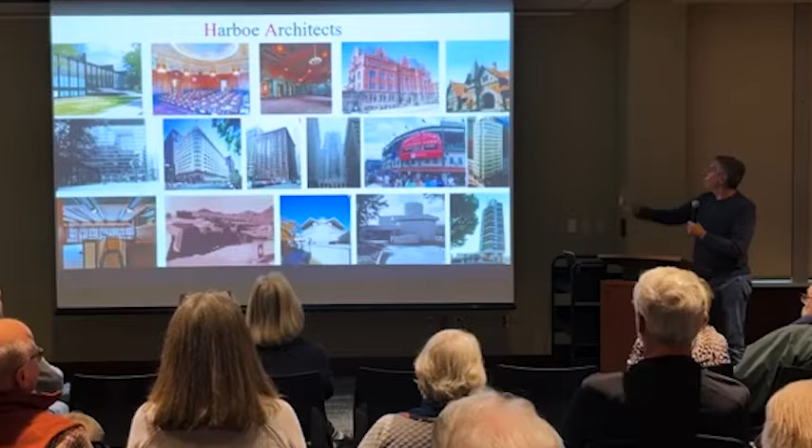More traditional buildings. This is at IIT. This is in Humboldt Park in Chicago. We did the entire exterior of the Carson Pirie Scott building in Chicago. Other high-rise in Chicago. We were the architects for the restoration of the exterior of Wrigley Field. The Reliance Building was one of the earlier projects that we worked on, as well as the collection of Wright buildings that I talked about earlier.

So, historic preservation projects, they're actually quite involved and they have a lot of steps, many of which aren't similar to what's involved in more of a typical renovation or adaptive reuse project or a new construction project. So the first step is figuring out what the building is and what's its history and what are its needs.

And so there's a whole series of planning that involves research, understanding both the history of the building and the physical materials and nature of the building and how that's changed over time. There's a whole bunch of really scientific analysis done with microscopy and using petrographers and other material scientists to really understand the material properties.

And there's working with the users of the buildings and the owners to figure out: this building was built 100 years ago for a certain purpose. You're using it this way now. How have their needs changed and how does the building still provide that? Or does the building have to be modified to keep it functional and useful in the future?

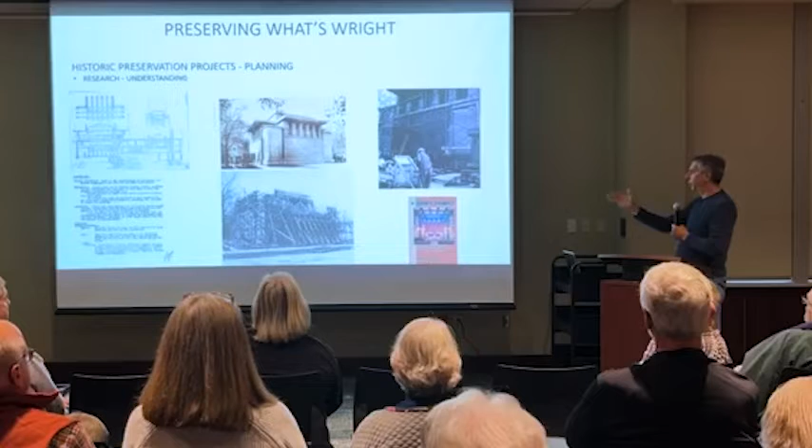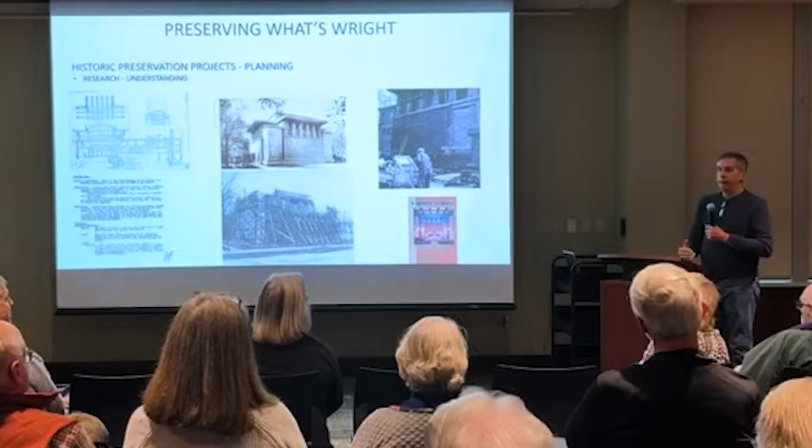And looking at other scholarly work, we don't always start from scratch. Unity Temple, Joseph Siry has written a very comprehensive history of the building. We'll take that and build upon it. We won't try to repeat what other historians have done. We may fact check it and make sure that if we find something, does everything we're seeing agree with what Joseph Siry found? Because there's these layers of history, and as you research it more, you learn new things.

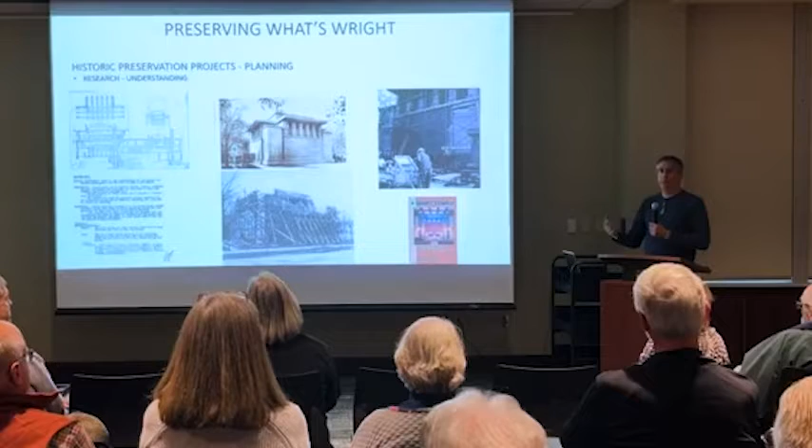Once we actually understand the history of the building and how it's changed, usually the next step is we actually go out and spend a lot of time hands-on in the building. We crawl all over the buildings, basement to attic, roofs, places you're not supposed to be able to get into, that were never intended to be gotten into, where all the rats live. And we'll go through and we'll assess basically every inch of the building. Masonry surfaces, we'll go out with a small hammer and we'll sound the masonry surfaces to see if there's areas of delamination. We'll do similar things for interior plaster. We'll look for, as you can see on the upper left, things like cracks and displacement, weathered wood.

These are all SAMARA photos actually. So, SAMARA, we had some garden walls that had started to topple over with some significant cracks. We had some minor masonry and lintel damage above windows and very worn exterior finishes on the woodwork. We had a lot of pattern cracking on concrete terraces adjacent to the wood and glass enclosure, which started giving us hints that there were other problems going on there. What was causing this to crack everywhere around the house?

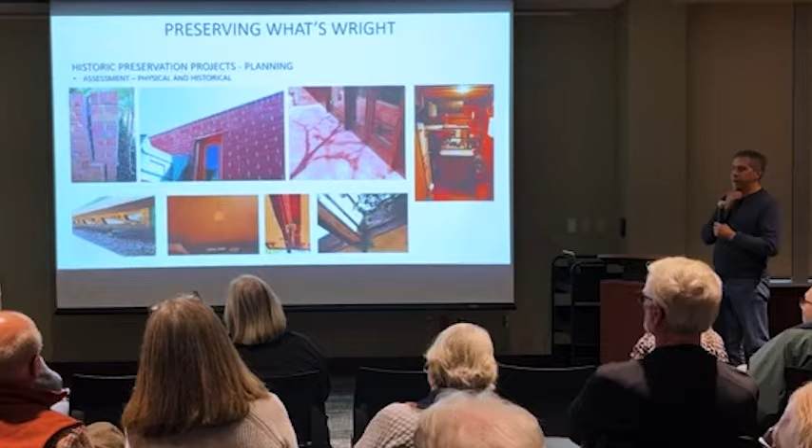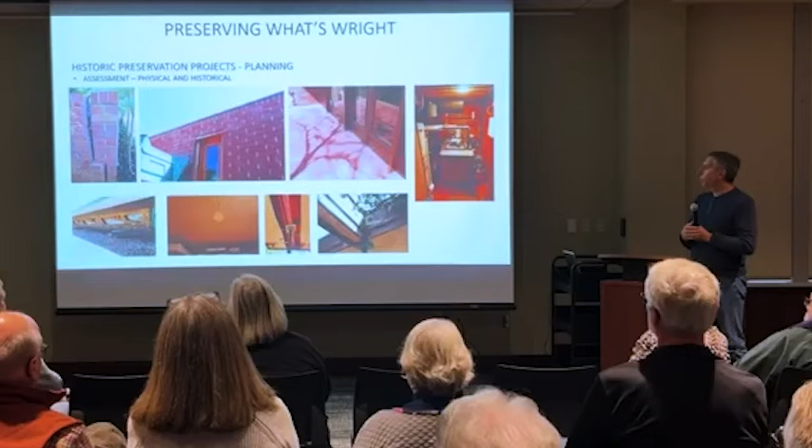On the far left bottom, that's some wood screens on some clerestory windows. They had a lot of UV and water damage on the wood veneers. Some cracked plaster. Likewise, when we see major cracking in plaster, our first question is what is causing this? And this particular one, we ended up making openings and bringing our structural engineer and discovered that the crack in the bedroom was because the exterior cantilever was grossly understructured, and we had to restructure the exterior cantilevers to fix the crack in the ceiling. And other structural openings and rotted woodwork around the house.

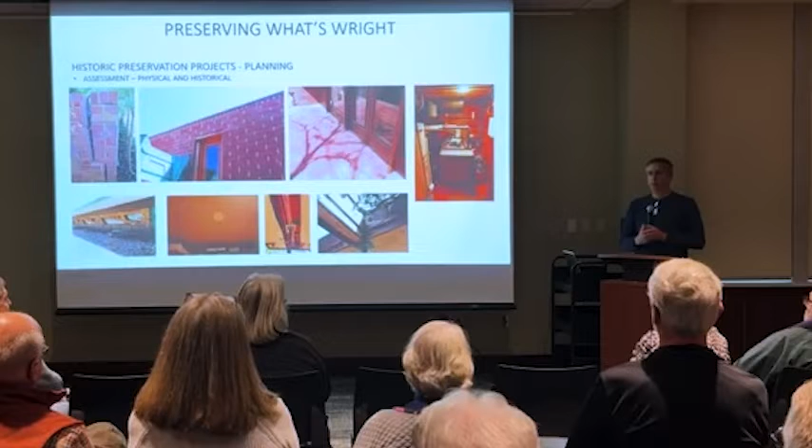But we'll do this and then we'll look for patterns and figure out what's going on as we repair it. Graphically seeing all these different types of deterioration together helps us not just go in and fix the crack, but try to figure out why that crack happened so we can hopefully make it not come back. Or decide that not all cracks are bad. Some cracks we say, it's cracked. It's there.

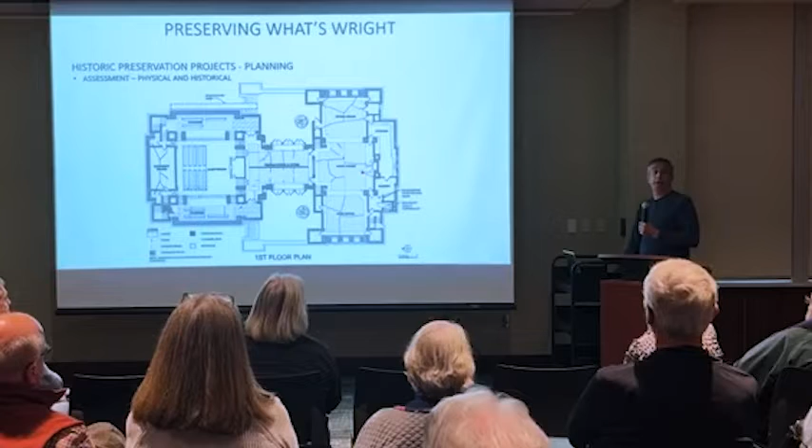And then there's, what is this? Okay, so there's also the analytical, sort of scientific end of this. And so in addition to just using our senses, visually looking at things, poking it with an awl, we'll bring in other specialty consultants.

Once we know where we're looking, we use a different lab, and we can actually do a type of analytical analysis in the lab to figure out, was that oil paint? Was it a latex paint? Was it calcite paint? What were the minerals within the pigments? There's a high level of science that will allow us to go back and figure out exactly how these coatings were made so we can replicate them.

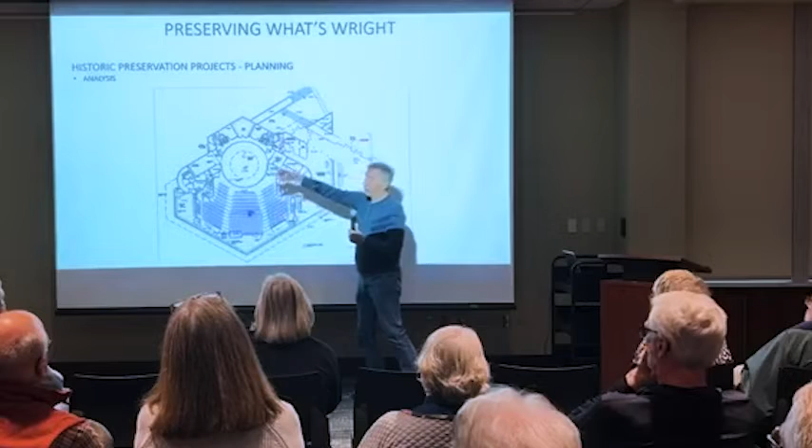This purple stuff, and the building was built in '59, around 1970, they re-raked the whole floor. They actually built wood risers over the original concrete risers because Wright's sight lines were horrible. All you saw was the back of people's heads. So they fixed it, kind of. You didn't see the back of people's heads anymore, but you lost some of the spatial geometry of the theater.

All of this sort of hotter pink color, this is an interesting conundrum. That's all work after Wright died. They immediately started making modifications to the building, and they hired Taliesin Architects, which was Wright's successor firm. So basically, Mr. Wright passes away, the exact same architects are sitting there in Wisconsin and Arizona, working in the same office. They hired that office, and they did a lot of additions and changes that were really hostile to Wright's original design.

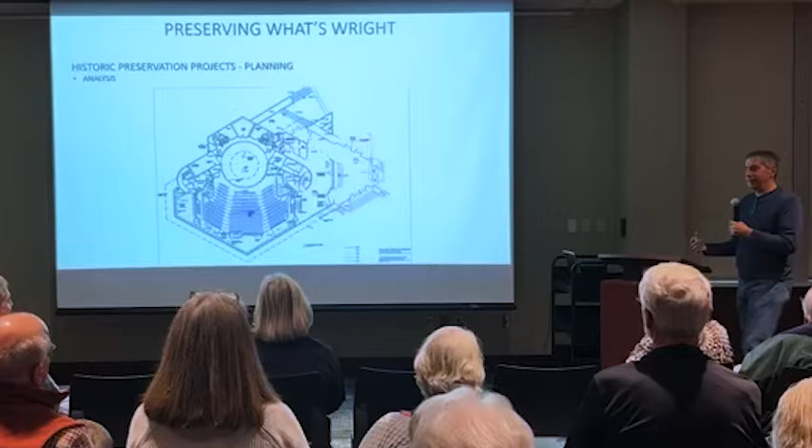And as part of the restoration, we're actually recommending removing all of the work that Taliesin Architects did to get back to Wright's original building. It's challenging because Wright basically gave them a theater that seats 300 people without a lobby, because he didn't think you needed one. So one of the additions was a lobby.

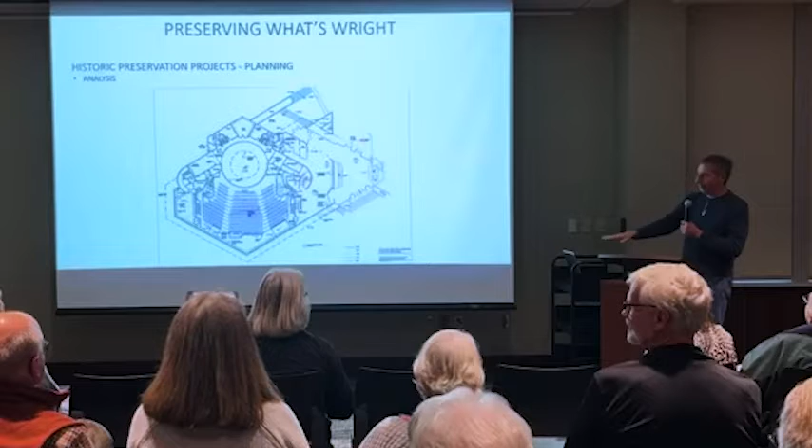We'll solve that other way through putting a lobby underground and connecting it. And same with the floor rake. We're getting rid of all that. Instead of fixing it the inexpensive way, we'll end up shoring major parts of the building, removing all the concrete structure on the interior that's the raked floor, and lowering the rake into a utilitarian space below. It will be more elegant, but much more difficult.

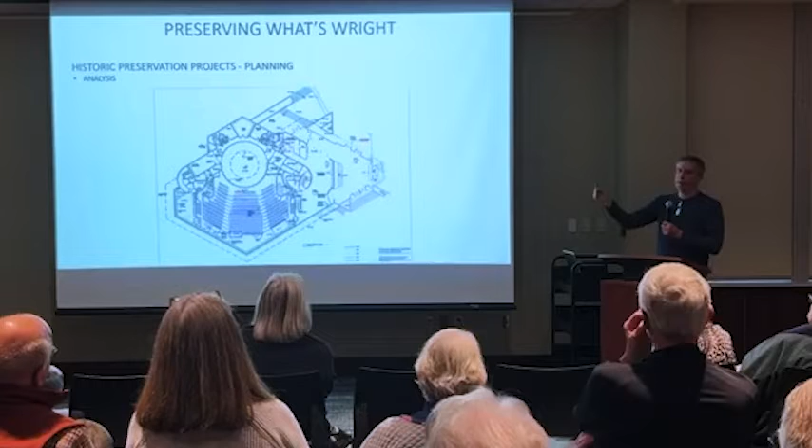But graphically, we'll lay out what was the history of the building, how did it change, so we can understand all these different layers, and when we're walking through the building say, oh, that's not 1959, that's 1983. And it helps communicate to everybody what's really going on.

This is another one of those analysis diagrams. We look at buildings a couple different ways. This is a diagram of integrity. And so integrity is what I'm looking at, really the original material. It's sort of the story back to George Washington's axe. If you replace the handle one time, you replace the head of the axe, it really isn't George Washington's axe anymore. It looks just like it though.

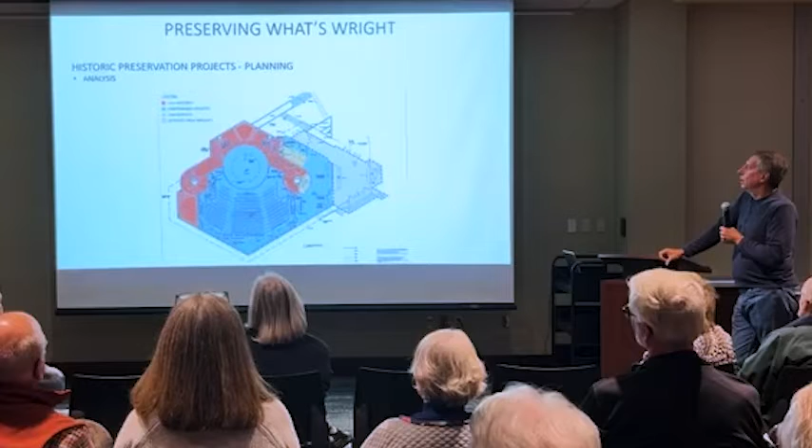And so this is a map of integrity from Dallas. And the red portions are the areas with the highest integrity. And all that means is that this is still original material in spaces that no one has done anything to. Doesn't necessarily mean they're important, but they have a high amount of integrity. The blue is pretty compromised integrity. As you can see, that's actually the main house of the theater.

The theater is the most important architectural space, but it doesn't have very good integrity. It's painted black, all the rakes are different, all the seats are gone. There's other spatial modifications; you walk in, you are not experiencing what Wright designed. So from an integrity standpoint, it's not very good.

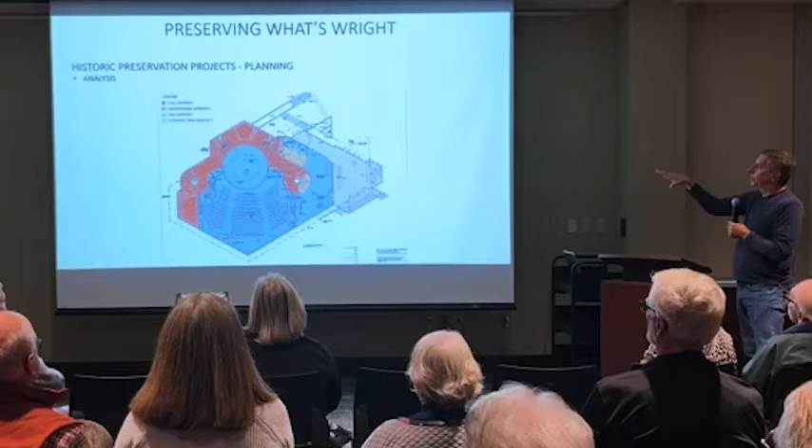And then these yellow areas are even worse. They've blown stuff out and changed them. And then this really light color up here, it detracts from integrity. That's all the Taliesin architect work that we're recommending gets removed.

Typically public lobbies, public entries, sort of what the public experiences in a building like Kalita Humphreys will be the highest level of significance. Back of house spaces like the green room and changing rooms for actors, that's more secondary. It's a support type of space. It's still important, it's part of Wright's original design.

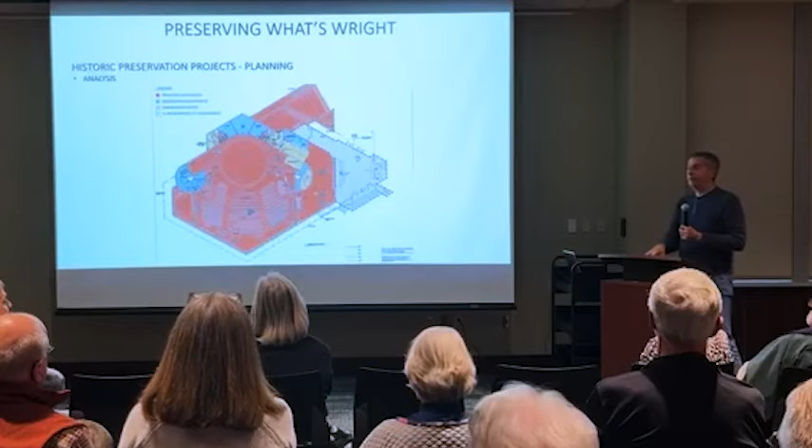These really highly significant buildings end up having a much higher percentage of significant contributing spaces than your typical department store or a building that was made more to be multifunctional or a more common contextual building. These masterworks, almost everything is important at the end of the day.

Other things we look at are, I mentioned we talk about what are the needs, and that can change. Sometimes that's really simple. We're working on SAMARA. SAMARA's interpreted as a house museum. The needs at SAMARA are pretty easily accommodated within the design of the house that it was. You get into other sites like Unity Temple. Unity Temple was built in the 1900s as a church. It's still the exact same church, same congregation, never has changed.

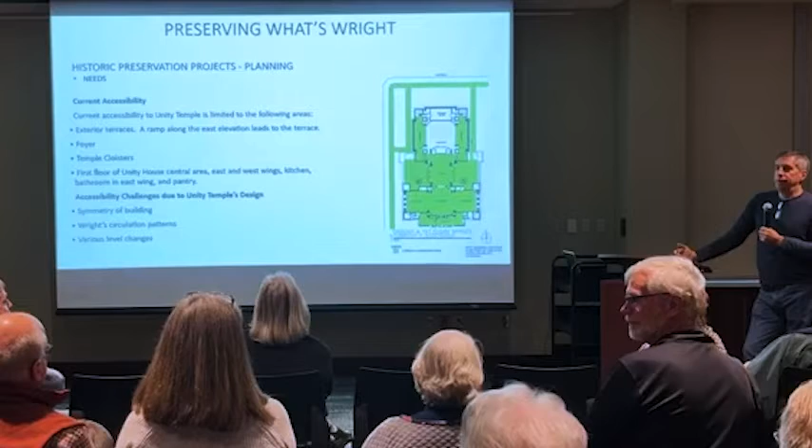Its needs 100 years later are a lot different. There's the way that they conduct their services, there's a large amount of music and theatrical performance, there's outside lectures, there's accessibility problems at Unity Temple, there's different types of religious education that was not done 100 years ago. So their programmatic needs are much different. And that becomes a real challenge.

How do you satisfy all the needs of that congregation? Because if they can't use that building in a way that's good for them, they may move. And then you have an empty church, which isn't good for anybody. So satisfying all those needs is also important. And this is just an example of one of those types of things. This is a graphic analysis of the accessibility of Unity Temple. And this is sort of currently accessible space.

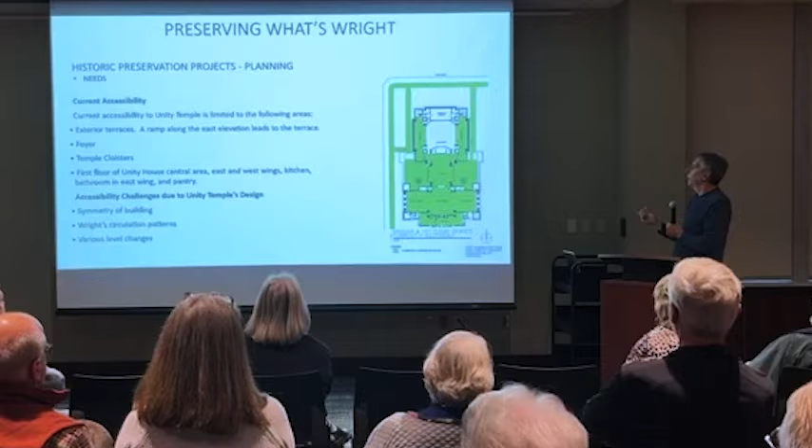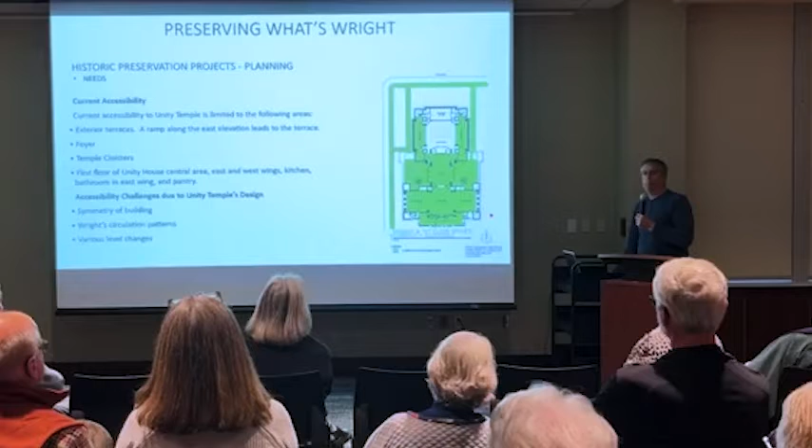One of the downfalls of Unity Temple before I did the work: this is where you sit for religious services. That's not accessible. You can sit over here in the cloister where you're sort of in a half basement looking in, but you can't actively participate in services at Unity Temple before the restoration. And there were other spaces in the building that were really important to how that congregation operated that you couldn't get to. And it was a problem for how that congregation operated.

And then we look at different design options. So we have all this information: this is falling apart, this has been changed, these are your needs, and then we'll do studies for different solutions. Sometimes it's just one solution. The concrete's original, it's got problems. There's usually not that many options on what to do about it other than to restore it, at least if your goal is to restore the building.

This is a project up in Waukegan, Illinois. The small building on the right of these images is the original Carnegie Library, and it's now going to be home of the Waukegan Historical Society. Their program's much bigger. The Carnegie Library has been abandoned for 60 years. It's had no occupancy. So it'll be a very nice transformation just to have the building brought back and used. But the Historical Society needed significantly more space to operate as a historical society, and so they needed a new addition.

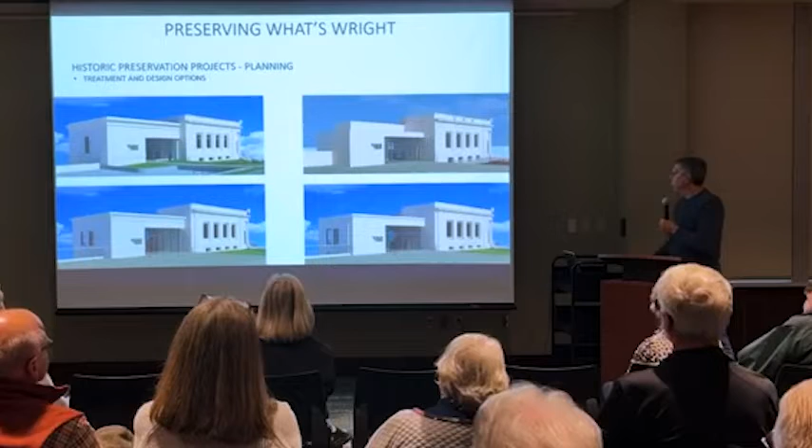And so we came up with a whole series of those. This is 4 of probably 12 or 16 different rendered schemes of what a new addition to this building would look like. Some small ones, some big ones, depending on what program we really wanted to bring into the building. And how do we articulate that and relate it back to the original building? Is it more contemporary and modest? Do we start bringing in some of the historic elements into it, but not a complete copy? And we'll work through these with clients and local stakeholders, such as the landmarks groups in the city, and get feedback and understand what's going to be the best solution for all the stakeholders involved in the project.

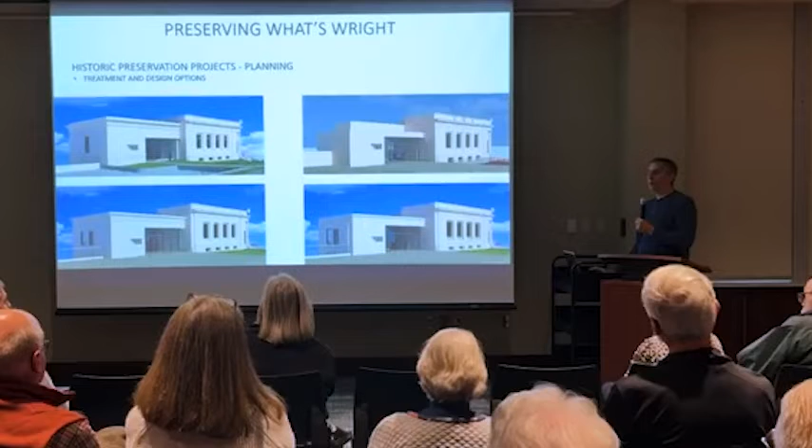Once we know what we're going to do, then comes the bad news. We work with contractors and craftsmen on our projects. New buildings, typically you would just hire a cost estimator and they'll go through a chart and say, here's the costs. Historic preservation work, it's really hard to do that accurately. And so we'll actually engage masons and carpenters and roofers and all the different trades that will be involved in these projects, walk them through our design solutions and work with them to develop budgets so that we have the best understanding that we can to advise owners.

And we'll also look at, oh, you don't have $11 million, you only have $2 million, so how can we phase this and what makes sense? You may want to do the pretty finishes first, but if you haven't done the roof that's leaking yet, that might not be a good idea. And if you have to dig holes all through the building to install new mechanical systems, doing that before you do this other stuff is probably pretty important, so you don't have to do things twice. So we'll walk through, working with contract partners, what's the right way to break this up into multiple projects so that it's sequenced in a way that eventually gets owners to where they need to be.

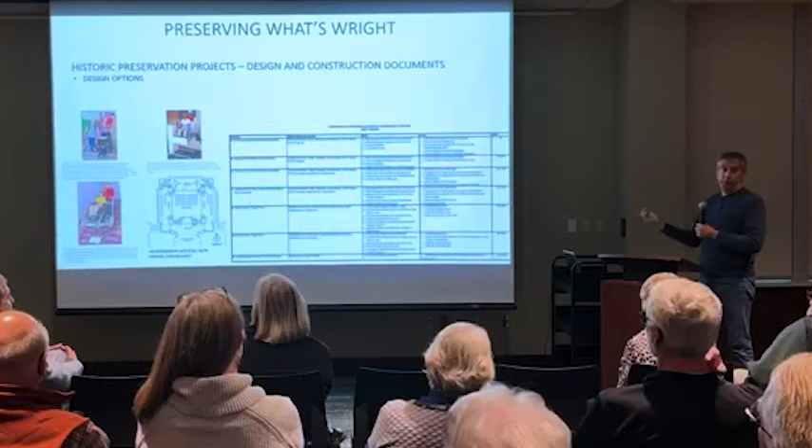And so it lays things out and it helps people make educated decisions as far as where is all this going to go. Because as much as we would like to always be making the decisions, we usually don't have that luxury. Usually it's all the stakeholders involved coming to some sort of consensus, unless we're really lucky.

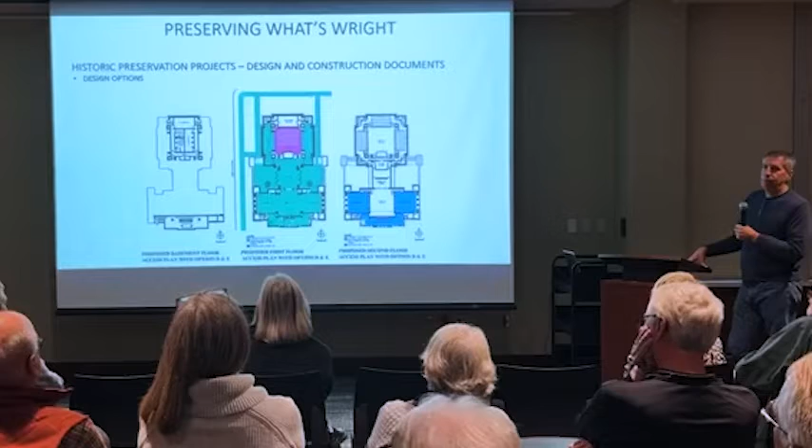And this is another version of that. So I showed you earlier the accessibility schemes for Unity before we started. This is what we ended up with. So now with this scheme, all of a sudden the main floor of the congregation space is accessible. And before, none of the second floor was accessible. Now, all three upper level areas where they do religious education classrooms are accessible using various methods.

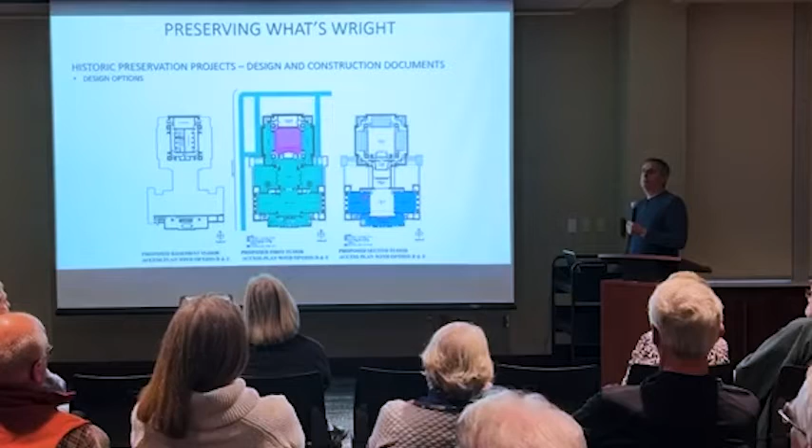This became accessible by putting a small chairlift on the stair. That's a permanent addition. These spaces became accessible by that loose piece of equipment that is motorized and will basically crawl up a staircase with a wheelchair on it and get somebody up there. There's a compromise in there, but the alternatives of putting an elevator in here and making all this work were really having a negative impact on this whole space, which is really important in the building. So it's finding the best solution for each particular case and each user group.

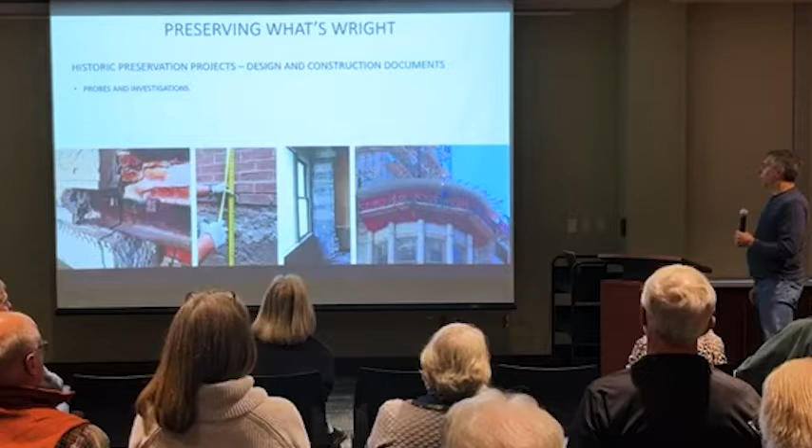This corner, which is curved, is very complicated, and we quickly learned that, yeah, it's curved, but it's not just a circle with equally laid out things because it was constructed by hand. So we actually hung swing stages from the building and made a life-size template out of plywood with the drawings printed full size and adhered to them. And we would make the masons hang all this stuff up here, and then we'd take lasers and say, oh, nope, this one doesn't fit. And we'd take measurements, we'd take it down, we'd do a whole other set of templates. And by the time we did this like the fourth time, it fit.

That seemed really onerous and expensive, but doing it with plywood and paper was much less expensive than having everything made with the final materials, coming out during construction when no one has time for it to be wrong and saying, oh, it doesn't fit. So we'll do stuff like that. Some of it's more typical. Here's an opening in a terracotta facade.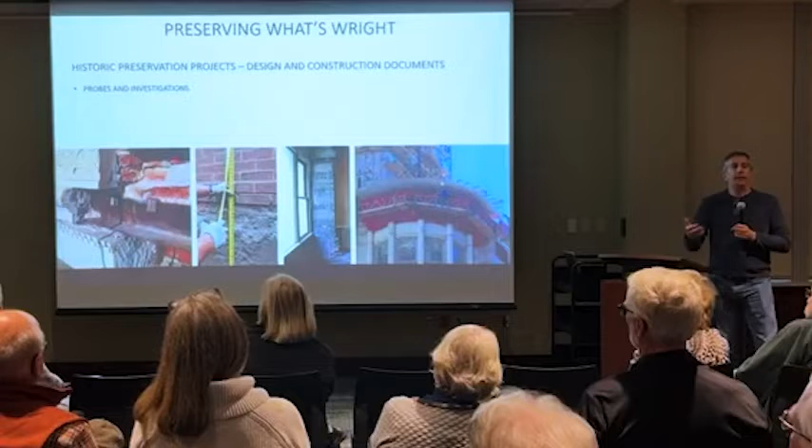If we see cracks and deterioration and we know we're going to be replacing some terracotta, we also have to fix why it's cracked. So we will bring in masons while we're doing the drawings for construction and have them actually remove portions of the terracotta masonry carefully. And we'll be able to see all the concealed steel in there. Is it just a little bit corroded and we can clean it up and paint it? Is it so corroded that it's not there anymore and now I have to remove more stuff and completely replace all of that? And what's the best way to re-anchor the new replacement materials?

So we'll do this really invasive partial surgery in representative portions of these buildings so that we really understand what's going on, so when we get to construction, we usually, hopefully, have gotten it right. Because fixing things in construction is much harder than fixing it beforehand.

This is another area. This is at Carson Pirie Scott when we were recreating this cornice. This whole pier is on the interior, but it was originally part of an exterior loggia at the top of the building. It was all concealed with plaster. We didn't know it was there. We were out there poking around and we're like, oh, let's make a hole here. And we made a hole and we found this original terracotta.

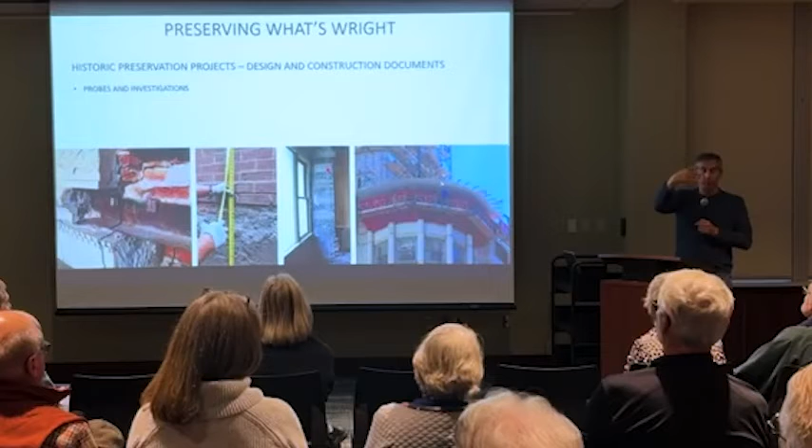It was the only original terracotta from that portion of the building because it was all removed in the 1940s and thrown in probably Lake Calumet. So by finding this, we actually knew exactly what the ornament and coursing dimensions were here. And even better, you can't see it in this photo, but we actually see ghost lines of where the cornice came into it. So we knew exactly where the cornice was, and at least part of its profile until we got to the part that was in Lake Calumet.

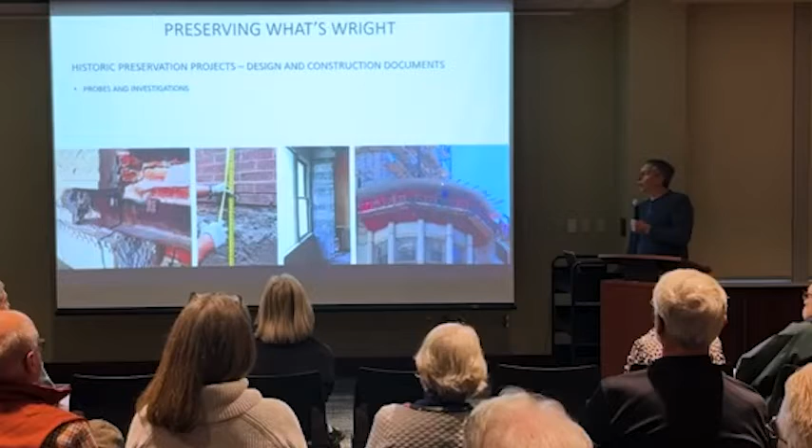Typically, we'll look at paint cross sections around magnification between 15 and 40. Unity Temple, we ended up getting the magnifications, I think, around 100 times. And the reason is because the original paint finishes at Unity Temple are extremely skinny. And until you get to that point, you're seeing 2 or 3 layers and you don't realize it. And we kept making that mistake.

The other weird thing at Unity Temple is the paint didn't cover everything. So there's this plaster that had this exposed sand aggregate. And when they originally painted it, the paint just sits in the little crevices of plaster but doesn't cover the sand particles, which means almost everything you see is actually the color of the sand and not the paint. And so once we realized that, then we had to very accurately take apart the plaster so that when we did new plastering, we matched the sand size, the sand color. We figured out a way to actually apply that plaster so that the sand was exposed to the same extent that it was originally.

We would paint samples of this, brand new samples, and send them back to the paint analysis people to cross-section and look at in the microscope. The goal was if microscopically my new finishes matched the original ones, then that's probably what it looked like. Because at Unity, we were not able to successfully expose finishes because the original paints were an oiled paint. We just really couldn't get the other coatings off of them.

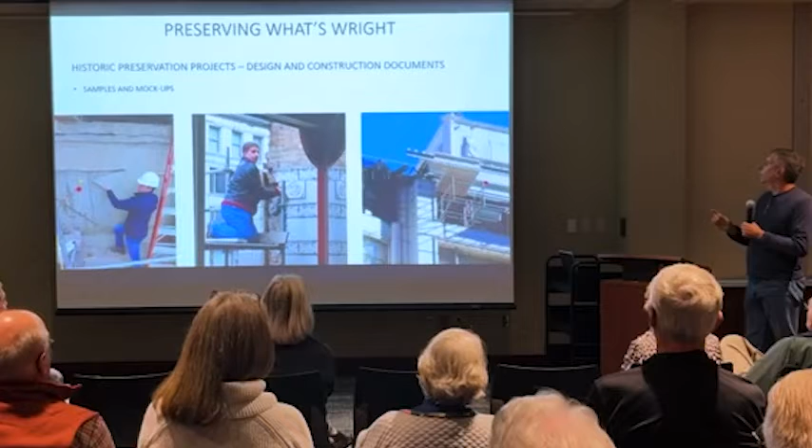They put the first one up and we said, that's too yellow. So we had them do another one, and they actually made 3 more of these big pieces, brought them out on site, hung them all up in the air, and then we came out and said, let's use the one on the left. But it's the same thing. If you don't do this level of trial and error understanding, you're almost always going to be wrong. If you don't keep doing that before you actually get to the real construction work, then the whole cornice on Carson's would be too yellow.

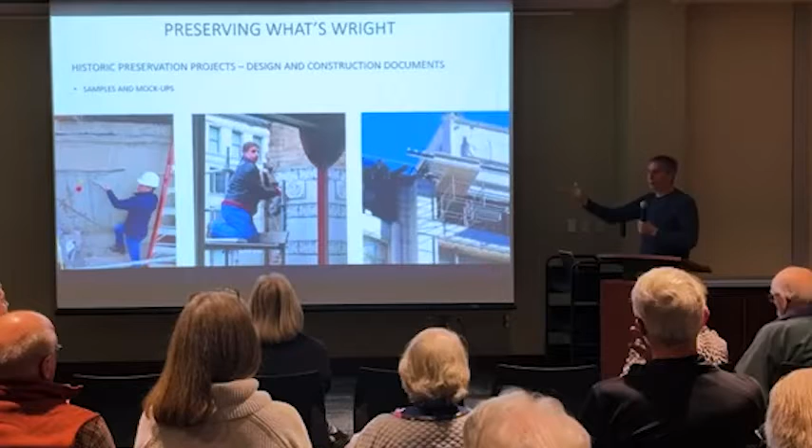And right now it looks really good because we went through all the expense and time, but all of that takes a ton of time. And if you don't leave yourself a very large window to go through these trials and mock-ups and samples, if you try to do it during construction, it's torturous because no one has patience at that point. We just got to get it done.

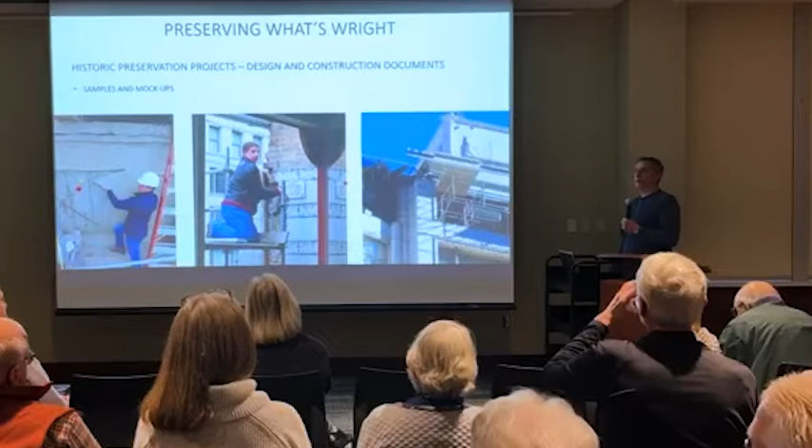A couple examples of other ways that we work with artisans to reproduce stuff. These are light fixtures from the Grand Army of the Republic Hall in the Chicago Cultural Center. All the original light fixtures are gone. They were all custom. We found all the original drawings that Tiffany Studios did of the light fixtures, and then we also found the historic photographs that looked nothing like the drawings. And we found the bids from the original construction in which the light fixture supplier had a proposed alternate for all these fixtures without any drawing documentation of what they were.

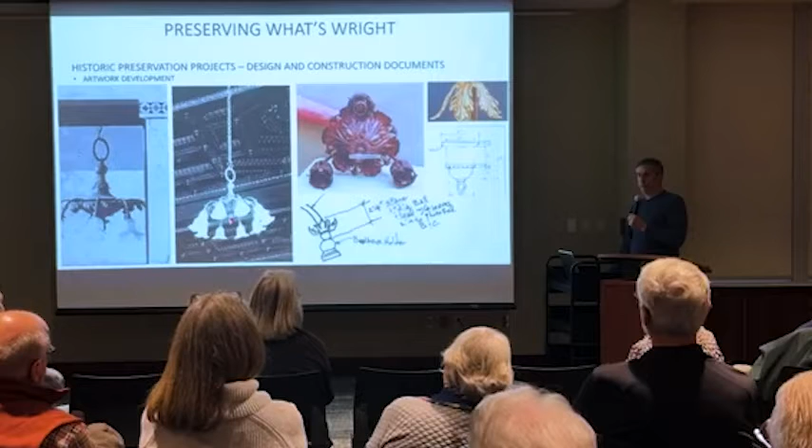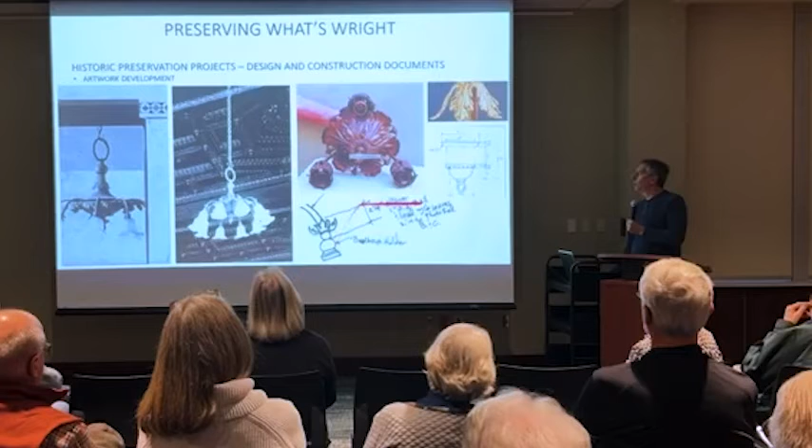And this is still a photo, but it's much more illustrative for me to have a conversation with an artist than just saying, oh, that doesn't look like what I think I'm seeing here. And I'll say, well, what do you think you're seeing there? I don't know. Sometimes we don't find the elements, and so we end up doing our own interpretive sketches of these things to communicate. Basically, we need to communicate to the craftspeople and artisans enough so that they can build this stuff for us. Sometimes it's very specific, sometimes it's a really horrible sketch like this one.

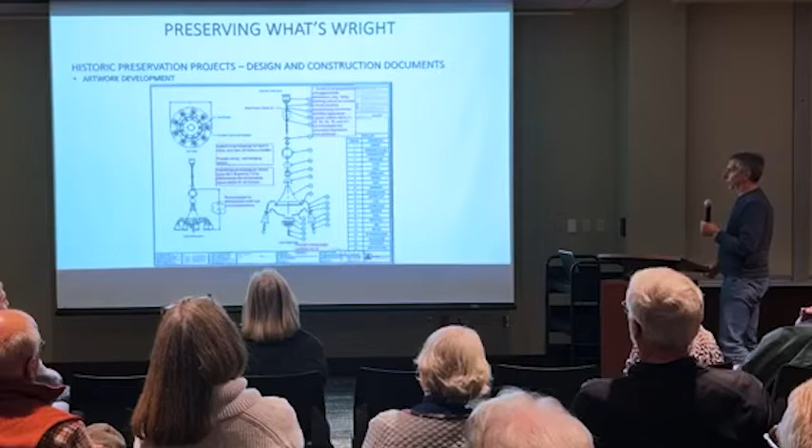Once we give that information to the artisans, then the fabricators or the artisans will start preparing the drawings that they will use to build this. So we have this loose thing of these pictures and stuff and say, make something that looks like that. They'll come back and do this whole detailed set of drawings, a drawing of every one of these pieces. And they'll send them to us, and then we'll give them all these comments. I don't like this, this piece is wrong. And there's a lot of back and forth.

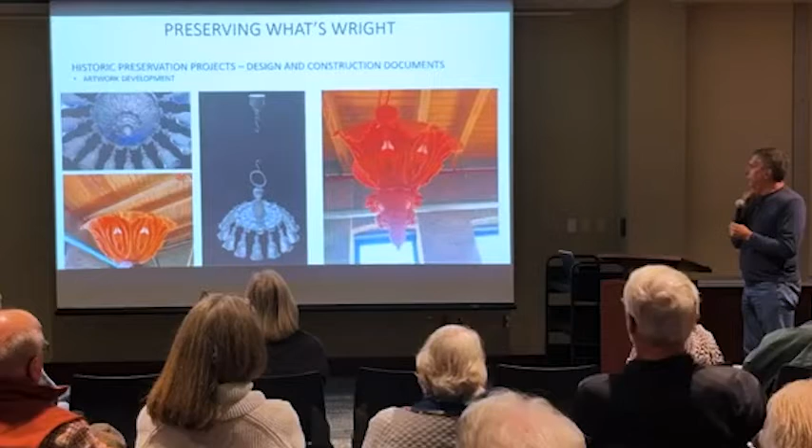For these, there's different ways to work with artists. These fixtures that we did for the Grand Army of the Republic, this is the first time we've done this. The fabricator actually used a 3D animator artist, and they built all of the fixture pieces. That drawing previously did all these pieces. Every one of those pieces they built as an individual piece in a computer model. And they were in Canada somewhere, and we were in Chicago.

And every week we'd get together, both me and a couple of my historians who are much smarter than me, and other people on my design team, and then the sculptor and other people. We'd get together once a week, and we would do basically artistic critiques of their models. And so, we started out with these gray images out of the computer model, and we could spin this thing around and zoom in and zoom out, and we could look at each piece.

And we would say, this leaf is too flat. That's sort of like Goldilocks. And this leaf is too curly. And they say, well, I don't know what that means. And I go look for more pictures from 1920 or something and say, I mean like this. Eventually, we get to the point where we say, yes, we like the computer model.

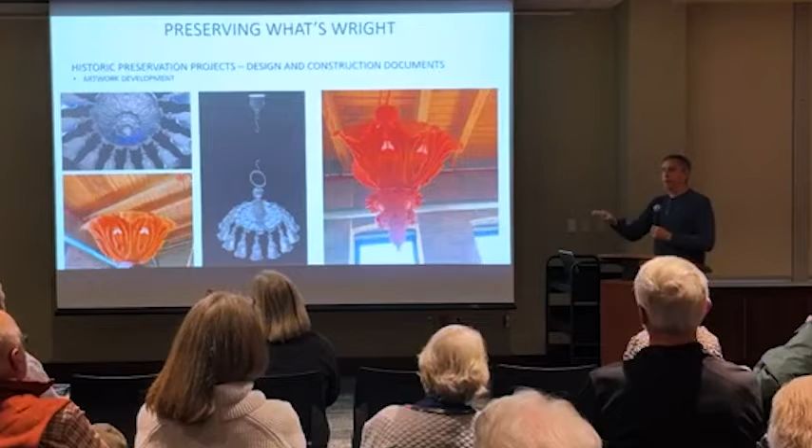Once we do that, then they print the computer model out on a 3D printer in foam. And we build the fixture out of foam. And then sometimes we say, that's good. Or sometimes we'll say, now that we see it, I don't like this leaf, let's start over on that. And we'll go back to the computer guy and he'll remodel it and we'll print another one in foam. And so there's this back and forth, because somehow you have to get the artist to see what you're seeing and then build it.

Whoops. Hold on. Yeah, that's the slide. Maybe not. Nope.

I couldn't make them better. If I had to do them again, they would look the same way they look, at least with what I have today.

A different way of working with sculptures. This is the cornice at Carson Pirie Scott. That image on the far left, that was the clearest image that we had of the original ornament on Carson Pirie Scott. And so we had to replicate that based on that photo, basically. So how do we start that? Well, we sort of build some context.

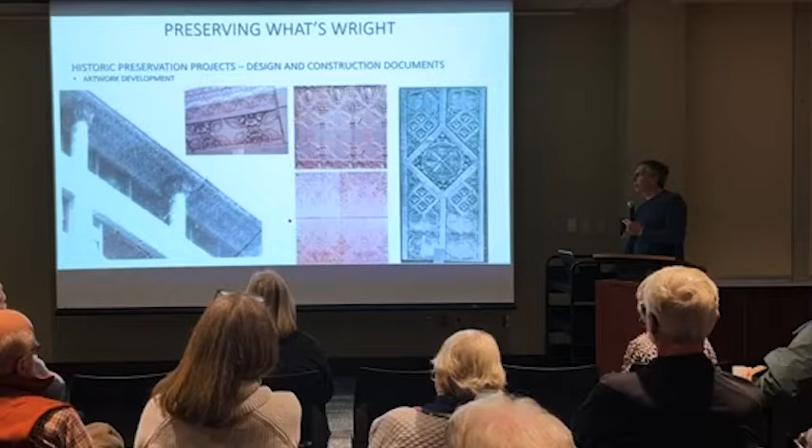And then we expanded that. So this is the cast iron ornament on Carson's. Very different execution of cast iron than terracotta. You can't get undercuts, and there's other things in this fabrication process that require the ornament to be different. We looked at other Sullivan ornament. These are plaster panels from the Garrick, I believe.

But basically, any place that Sullivan did ornament, we went and looked at it, and if we thought it had relevancy to Carson's, we collected images or physical samples of it. This was a really cool, I don't even remember where this came from. This may have been unbuilt from Sullivan. I forget where it's from, but this has a really interesting relationship to this because the panelization of this had a lot of similarities to what Sullivan was doing here.

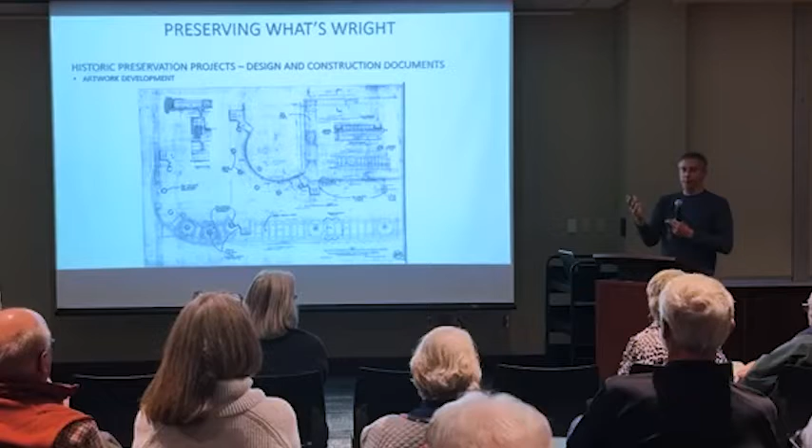We'll also go back and look at the original drawings. We have all the original drawings from Sullivan. It should be easy. Except Sullivan designed all the masonry in carved marble. And then there was a stonecutter strike during construction. They switched it all to terracotta, which allowed Sullivan to totally change the ornament design because terracotta is much more expressive and fluid than carving marble. And he had Christian Schneider to sit there and carve all that wonderful ornament for him. So we knew the basic proportions and geometry of this thing, but we knew nothing about the ornament.

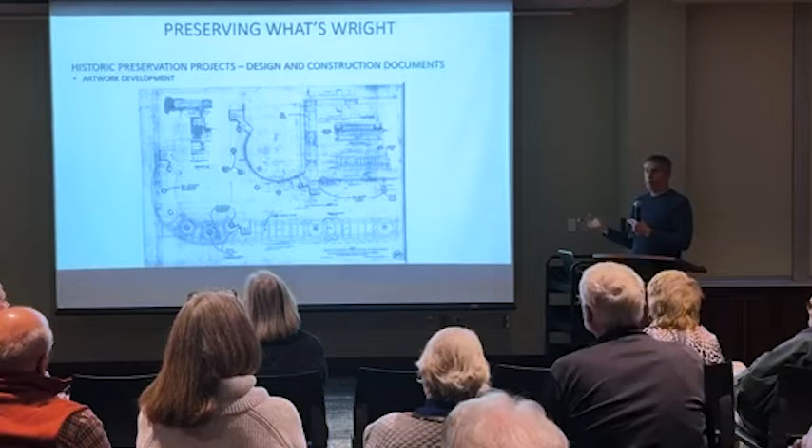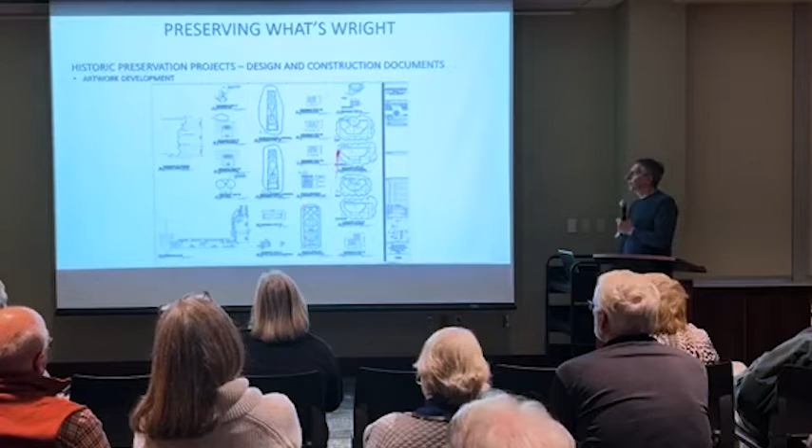So what did we do? We drew, that's what we do. We drew the basic proportions and geometry of this stuff, and we sort of made a puzzle. And so we need a whole bunch of these pieces and 37 of these pieces, and these are the capitals. And so we dimensionally put constraints. These are the dimensions of what these things are going to be to make them fit on the building. And this is the basic geometry that we can see from photos of the types of elements on there. We just don't know what those elements look like.

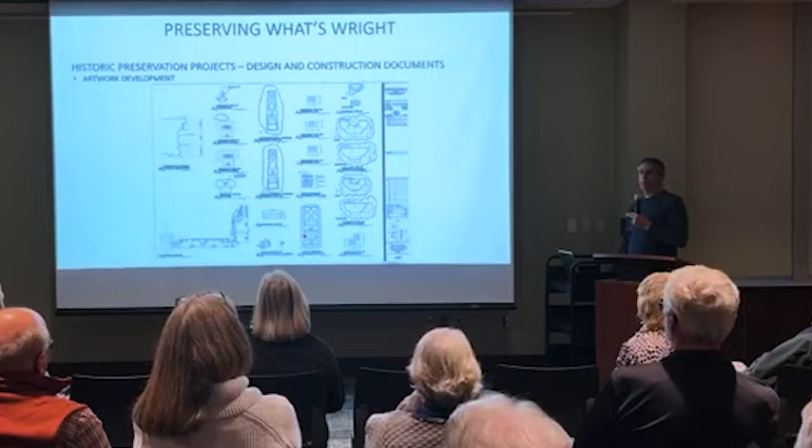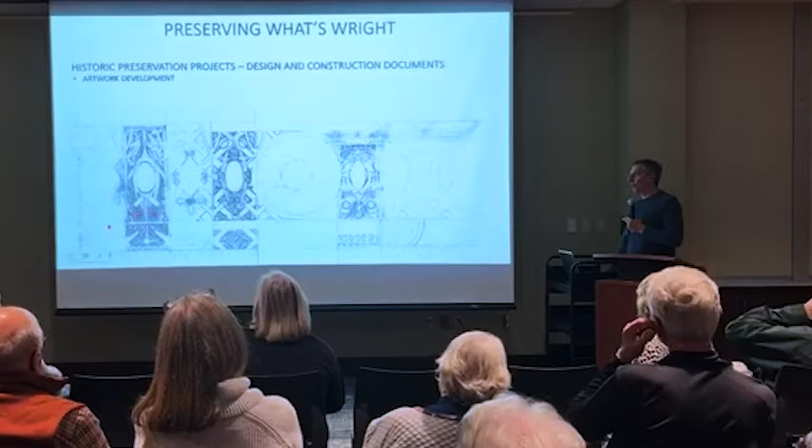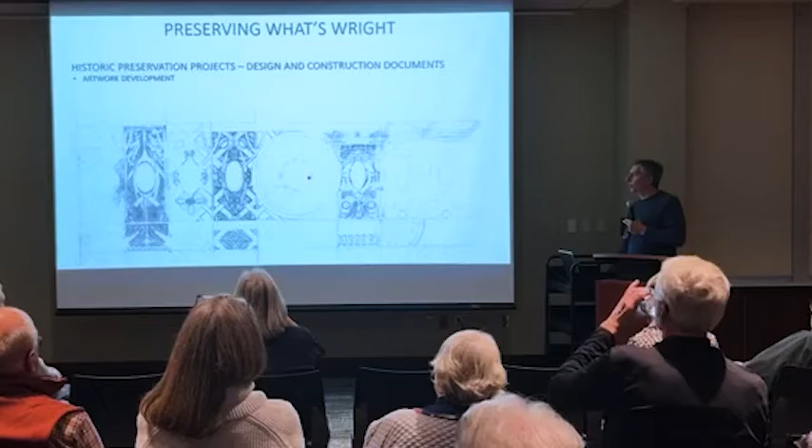So then we hired a team of artists. For this one, we hired Conservation of Sculpture and Objects Studio just outside Chicago, and they gave us a team of sculptors and artists. We started out on these large, full-size drawings that they were developing. They're beautiful, but we were extremely unhappy with where these were going. We couldn't communicate to them what we wanted because we just had that lousy picture to point to. And so they couldn't see it, and we couldn't say it wants to be like this. So we basically tossed all these drawings aside, and we decided to just work in clay. Well, let's just keep sculpting it in clay until it's right.

And we brought in great experts. This gentleman here in the brown suit coat, that's Tim Samuelson, cultural historian of the city of Chicago, one of the nationally preeminent experts on the ornament of Louis Sullivan. I had great access to him. He lives in my building. So I would take Tim to the sculpture studio every week.

And this is a series of progressions. So this is sort of how we started. They took that geometry, laid it out in clay, and we knew we had all these negative zones that were leafy or tendrilous or something. And we started building it up, and then Tim had great historical knowledge of how Sullivan did this at the Garrick and how Sullivan did this at the Guaranty Building.

And we had all those examples too, but he really got it. And so having our office, in our opinion, and his, to be able to continually talk to these sculptors, eventually we get to this, which probably looks nothing like what Louis Sullivan actually did. This is what we did. But based on what we had, this is our best interpretation in 2006 or whenever I did this, of that. And as you experience the building, it's a good experiential interpretation of Sullivan's cornice. I would never say that that's Louis Sullivan's work. That's my work.

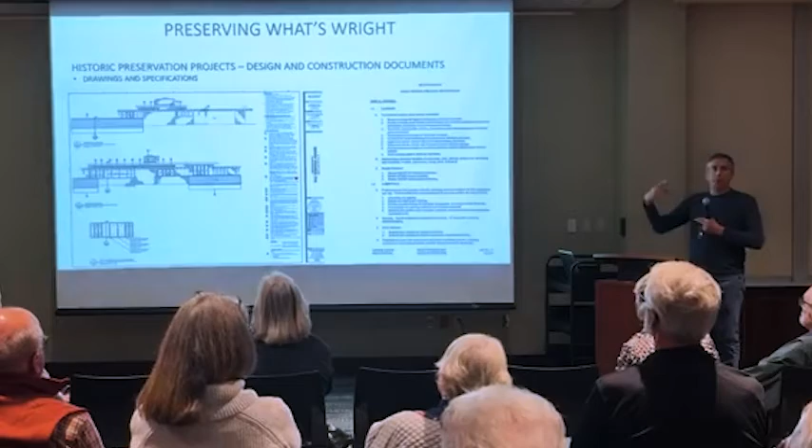I've had artisans quit and leave and never come back, but it's really hard to make someone that doesn't know how to do this get the skills to do it. They just get frustrated and leave. But all these people worked with me multiple times on these projects, and they're the real reason this work is as good as it is.

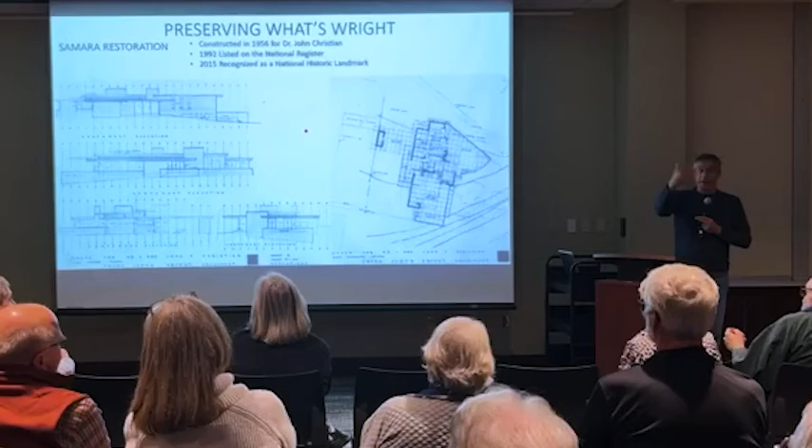Really quickly, I wanted to run through SAMARA. Just give you sort of, since it's down the street, that's kind of where we're at. I want to give you an idea of tying all this back into what are we doing at SAMARA. So if you're not familiar with SAMARA, it's a Usonian house designed by Frank Lloyd Wright for Dr. John Christian here in West Lafayette. It was originally constructed in 1956, and if I make any mistakes, Linda, feel free to correct me, but I'm not going high into this history. If you have history questions, just go over there.

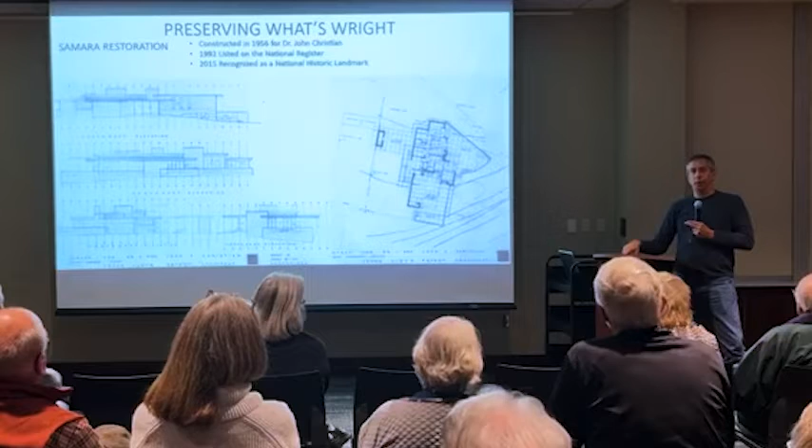It's an interesting house because when they commissioned Wright to do this, they didn't really have enough money to build it, at least not the way Wright designed it. And so Wright understood this, and they constructed the house, and Wright gave them sort of this whole portfolio of, when you have money, then add all the copper fascia to the eaves. And when you have money, add this. And they actually did that. It's really the only example of that I've really seen in Wright's work, where an owner had a portfolio and over a period of many years gradually kept completing the work to what Wright designed.

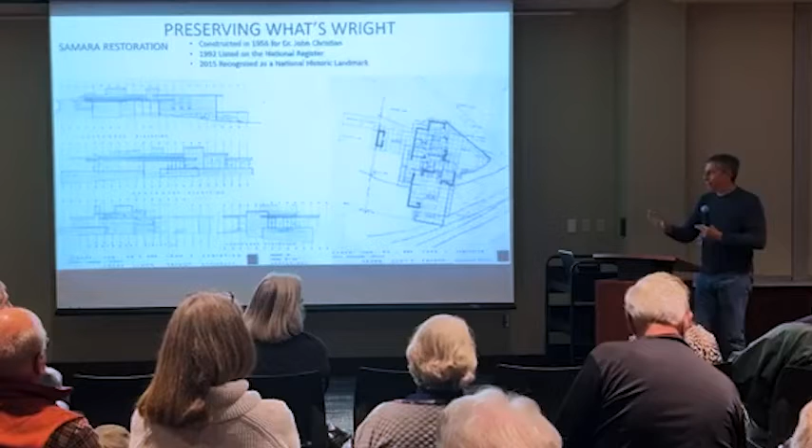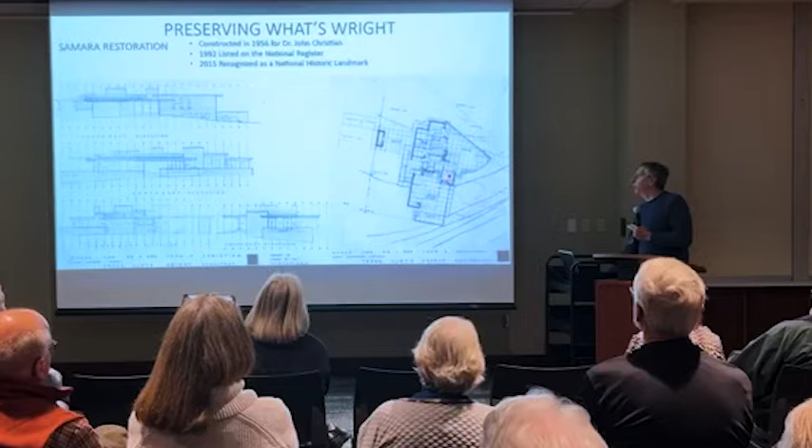Fabulous. And these are the exterior elevations. This is the floor plan. If you're familiar with the house, you come up this driveway. There's a loggia here. You come into this entry. There's this beautiful living room with a sunken seating area with this beautiful full-height wooden glass wall that looks out onto this terraced walled garden. And then you step back up and there's a small dining area, more wooden glass, and then out here is a little lanai garden. So I'm going to talk about projects at this living room terrace, at this lanai garden wall, and mostly this wooden glass wall that enwraps the house.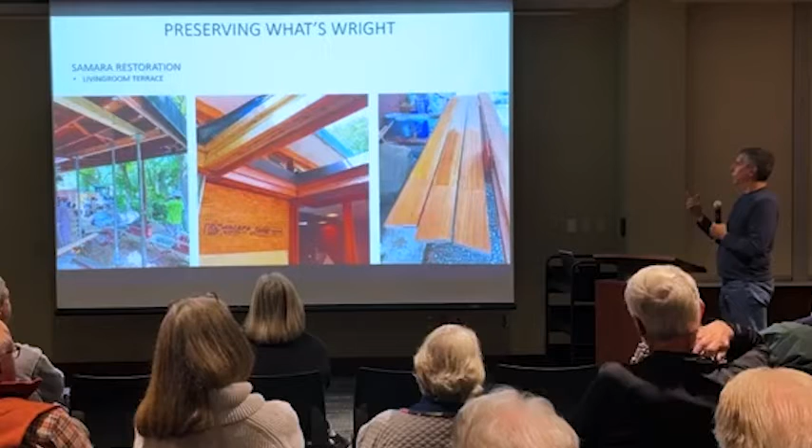And then a lot of wood repairs, and so rotted wood we replaced. We used a different species that's not as prone to rot, weathers better. Exposed cladding, which was mahogany. We went and we found as close of a match to Philippine mahogany, which you can't buy anymore. So we found the closest mahogany we could, and used that for replacement exterior cladding material.

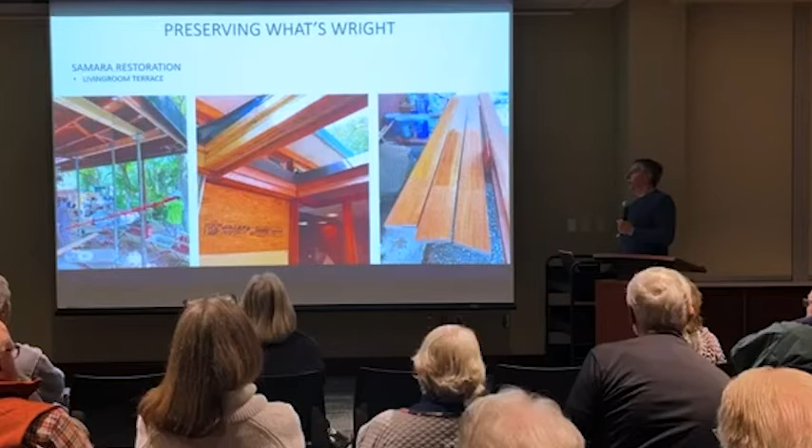So we removed the trees. We dismantled this whole wall. We did further inspection of the concrete footing to make sure that it was as good as we thought it was. And then this wall's getting rebuilt, basically, with additional reinforcing added in, and tying it back in, and using as much salvage brick as we can, and where we can't, using a really good match.

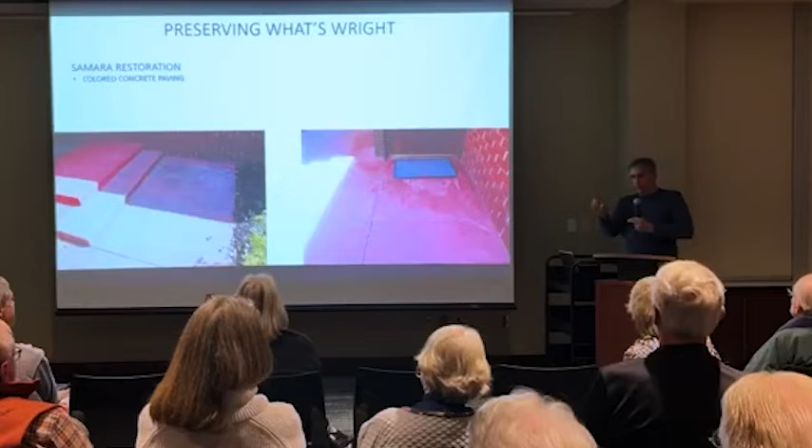I mentioned a little bit about the red concrete. There's a lot of red concrete on the outside of this house. It's the exact same red concrete that's on the inside of the house. It's sort of a seamless transition. The concrete, it is red, but the concrete they actually place is not. So the concrete they place is a regular gray concrete, and then there's a finishing layer on it.

It's called a dry shake hardener, which all that means is when the concrete's still wet the day they place it, they spread this red powder on it, and then they trowel it into the cement paste on the top of the surface. So that red coating is only that thick.

And so after many, many dozens of these, we look at it and say, that one's no good, that one's no good, that one's okay, but not perfect. I want it a little bit redder or a little bit less red. And they keep tweaking that, and over multiple months, they finally get something that we like. And we'll say, that puck is the good one.